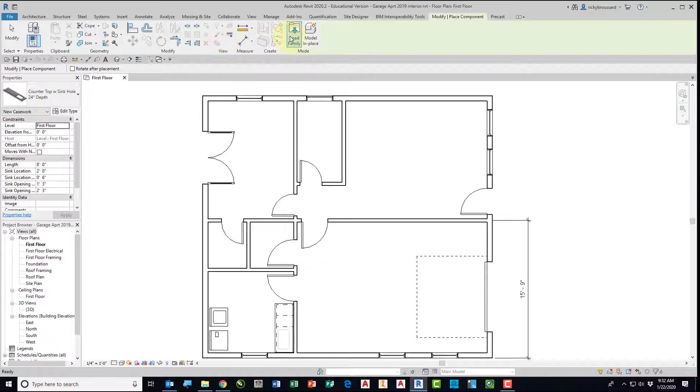With your garage apartment open, let's go to component, then load family. We're going to go to mechanical, architectural, airside components, furnaces, and select the furnace. With the furnace selected, we're going to drop it right here in this closet.

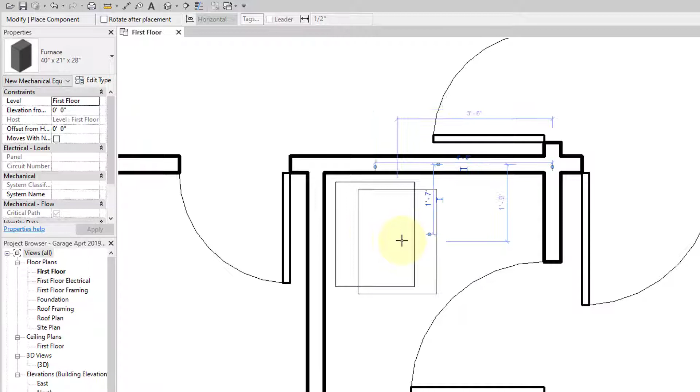That's going to kind of represent the interior HVAC system: the furnace, the air conditioning system, the blower, all that. That's going to be all of our internal components.

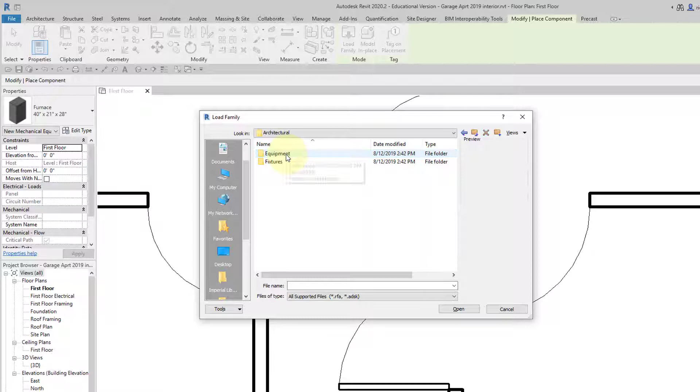Then we're going to go back to components, back to load family. In the look-in window, we're going to go back up to US Imperial, then go to plumbing, architectural, equipment, water heaters. Once the image pops up, we're just going to drop it right here in the closet. You want to make sure you have enough clearance right here that the door opens. You may have to adjust this either way, or maybe move the door just a little bit, but that door should clear and leave enough room for that water heater.

So that's your mechanical space. Now let's look at the closet. We're going to go back to components. This time the component we need is loaded, so we're going to go to the C's and pick closet, shelf and pole, 15-inch deep. We're going to change this tool down here to place on work plane.

Then all we're going to do is come to this corner and sketch from here to here, and that puts in our shelf and pole for our closet. Now if when you go to draw it puts it on the other side, just stop, come back, go this way. So the direction determines it, and sometimes it may get a little wonky. You just have to play with it until it works.

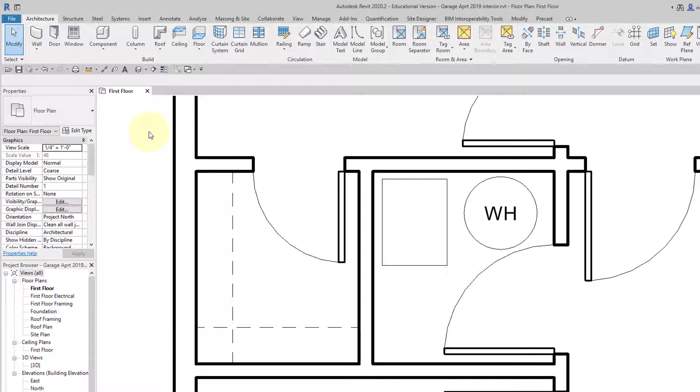So let's go to the 3D view, and here you can kind of see the shelf and the pole right here. And then if we go here, you can see the HVAC unit and the water heater. Obviously there's no ducting, but at least it gives us an indication of kind of space usage.

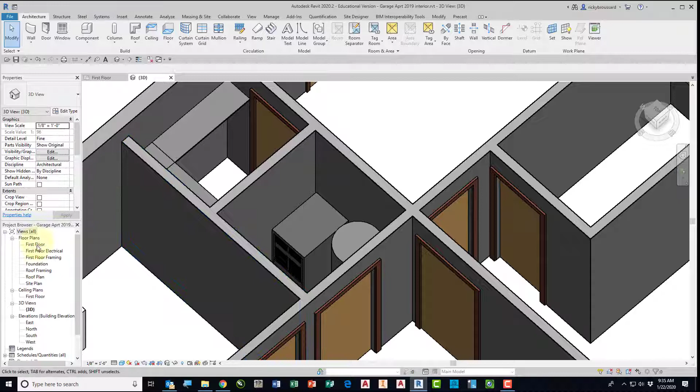We're going to go back to the first floor, to the bedroom right here. Go to component, and this first one should be loaded, so we're going to go to the B's and just do a double bed, then rotate the bed and set it here.

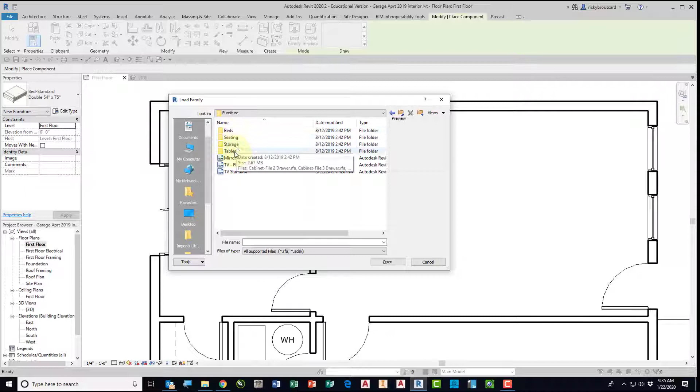Okay, and then we need a dresser, so we're going to go to load family, change this back to US Imperial, go to furniture. Under furniture you'll see you have beds, seating, storage, and tables. So we're going to go to storage and load the dresser.

Then we want to select the 48 by 60, and we're going to rotate this. I believe that's the correct direction. We're going to put that there, and then we may have to move the bed just a little bit. Okay, so that gives us a dresser in the room.

And you could flip the bed and the dresser. There's nothing that says that's how they have to go. This is just to kind of give you an idea of how to bring in objects and components. So we could flip those just a little bit.

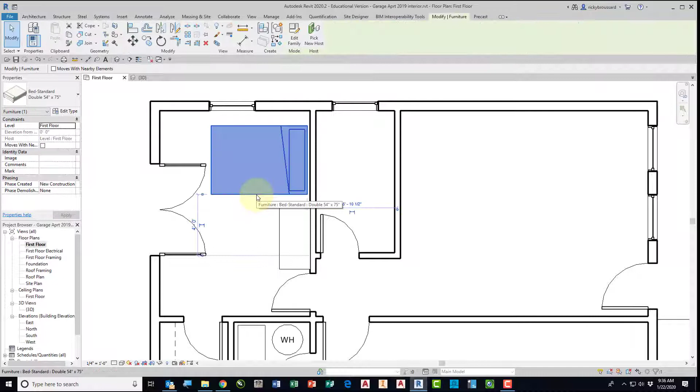Okay, all right, and then the last one for this video is we're going to do the bathroom real quick. We'll do the kitchen as a separate video. So I'm going to go to component.

Go to the properties, and I'm going to go to the T's and find tub, rectangular 3D. Now the tub works kind of interesting. You'll see that when you bring the cursor out here, it kind of has a little 'don't smoke' symbol, I guess that's what you'd call it. And then it doesn't pop up until you touch a wall. So we want to touch this wall right here, and it should just fit between those two walls.

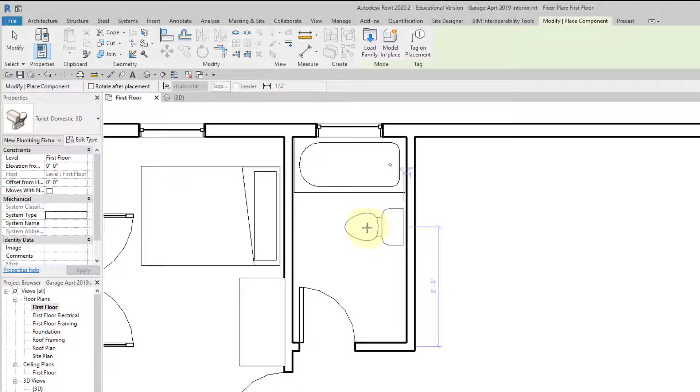So that's our tub. To do the toilet, we basically just go right back to the components, right back to the properties window, select domestic toilet 3D, and we're going to flip it, rotate it, with the space key, and we'll drop it for right now right there. Okay, so that gives us a toilet, that gives us a bathtub.

Now we need some vanity cabinets. So we're going to go to components, back to properties, and we're going to look for V's, and we should have a vanity cabinet double door sink unit. Let's pick the 36. We'll rotate it and put it in this corner.

And then if we're going to have a vanity, we need a cabinet, we need a countertop for it. So we're going to go to component. Just note that vanity countertops and regular kitchen base cabinet countertops are at different heights, so make sure you're using the right one. Don't use base cabinets in the bathroom. Those are vanities. A base cabinet is actually taller than a vanity cabinet.

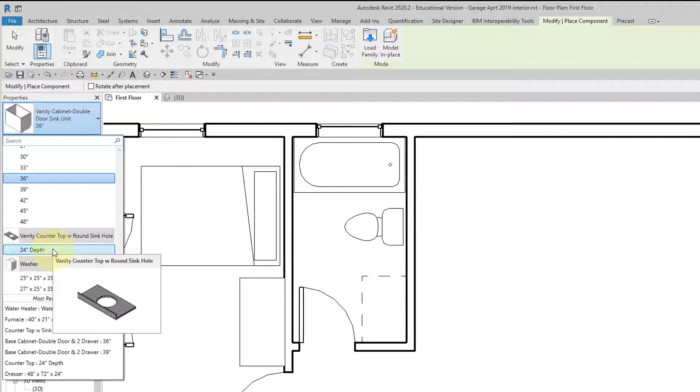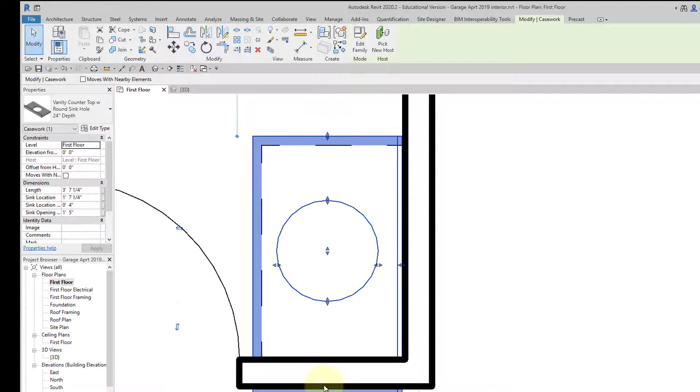So we're going to go to vanity cabinet, vanity countertop with round sink holes, 24. Bring it in, rotate it with the space bar, place it. And then what we want to do is center the hole in the cabinet, and then use the arrow keys so that it's just touching the back wall, just like we did with our kitchen cabinets. Then we're going to use the arrows to bring it in so it just sticks out the end over there, and bring this arrow up so it touches the wall.

And then if we go to the 3D with a little rotation, you can see what we've set up. So we have a toilet, we have a tub, and we have a cabinet and a countertop.

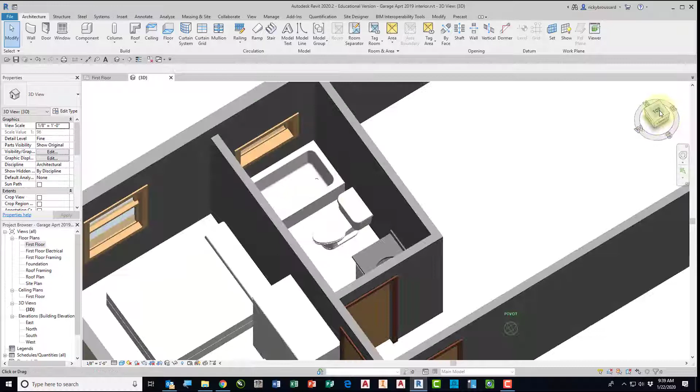And yes, I do realize that there is a window in the sink, a window in the bathroom. That's actually kind of typical. If we were spending a little more time on this, we would adjust the height of this so that it was about 5 feet, 6 feet tall. Typically the window would be glassed, not translucent, but it would have a coating that would allow you not to see inside of it. But it also serves as a fire route, an emergency evacuation route in case of a fire.

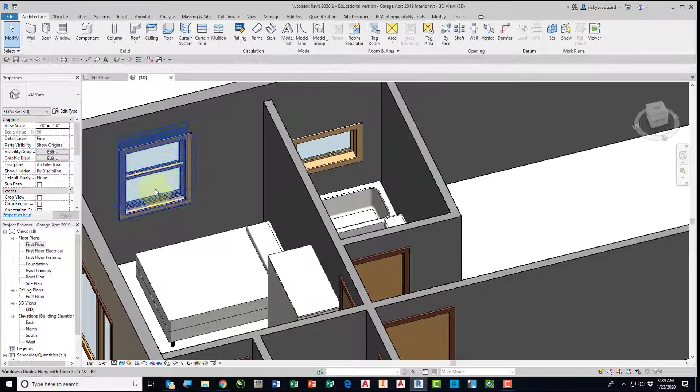For skinny people. All right, let's go back to the first floor, and there you go. So we've done the mechanical room, the closet, the bedroom, and the bathroom. We will do the kitchen in the next video.